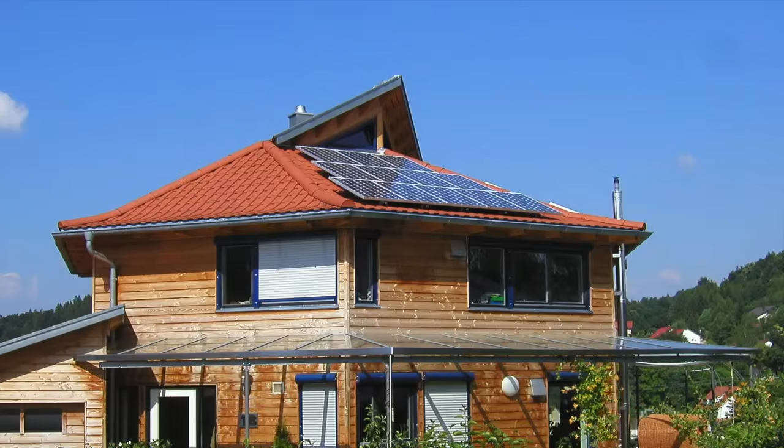By promoting renewables for electricity as well as heat markets at a very early stage, Germany laid the foundations for this new and emerging sector. With its strong home markets, Germany is today in a position to make its know-how available to partners throughout the world. The German wind power market is among the largest in Europe.

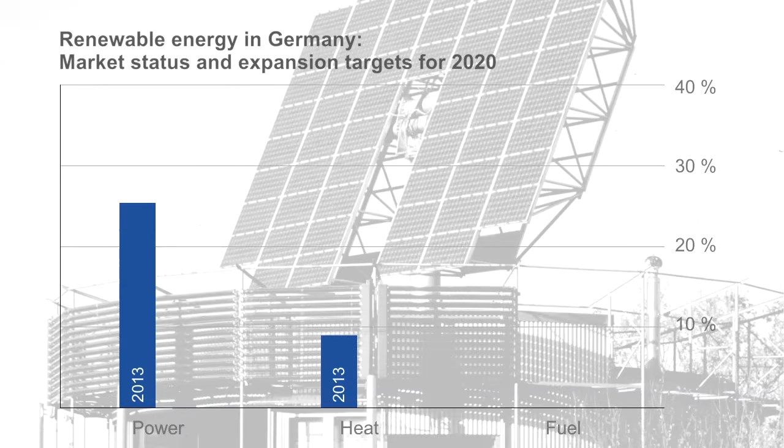In the area of photovoltaics, the German market is among the most developed markets in the world. In 2013, renewable energy supplied more than 25% of the power consumption in Germany and 9% of its heat. In the fuel sector, the percentage share was 5.3%.

Official plans envisage a share of 35% in the power sector and 14% in the heating sector being achieved by the year 2020. In the fuel sector, the share achieved should be 10%. It is planned that by 2030, renewable energy should represent 30% of the final energy consumption. And that is just the beginning.

A German company shows here in its own headquarters just what can be achieved: a building complex which is completely energy self-sufficient.

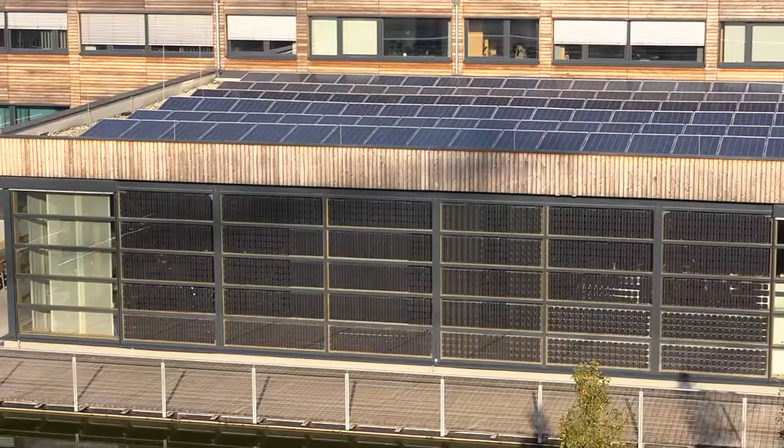My vision of the future with regard to renewable energy is quite simple: 100% renewable energy as quickly as possible throughout the whole world.

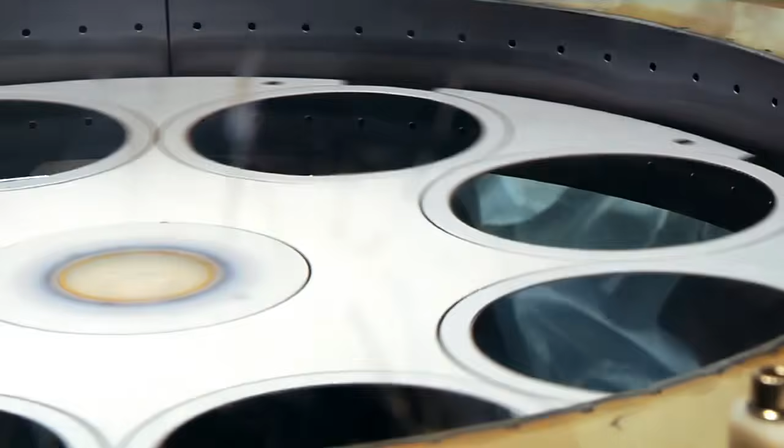In addition to its early development of the market, Germany also occupies a leading position in the further development of renewable energy technologies due to its promotion of research and development in this area. People around the globe trust German expertise. This makes German companies, thanks to their many years of experience, important and strong partners in all areas of sustainable use of renewable energy.

Wind power has been used in many regions of the world for centuries, whether it is for grinding corn or pumping water out of the ground.

Modern wind turbines use the kinetic energy of the wind and generate electric power from it. Each individual multi-megawatt system generates power for several thousand people, and the technology is one of the most efficient of all the renewable energy systems.

At the end of 2013, there were wind power turbines with an output of around 318,000 megawatts installed throughout the world. Germany has taken a leading role, with over 34,000 megawatts of installed capacity, and is the third largest wind power market in the world, which makes it the largest in Europe.

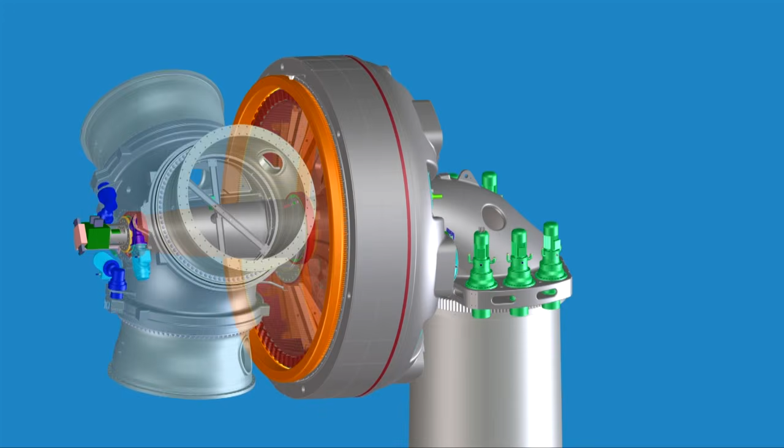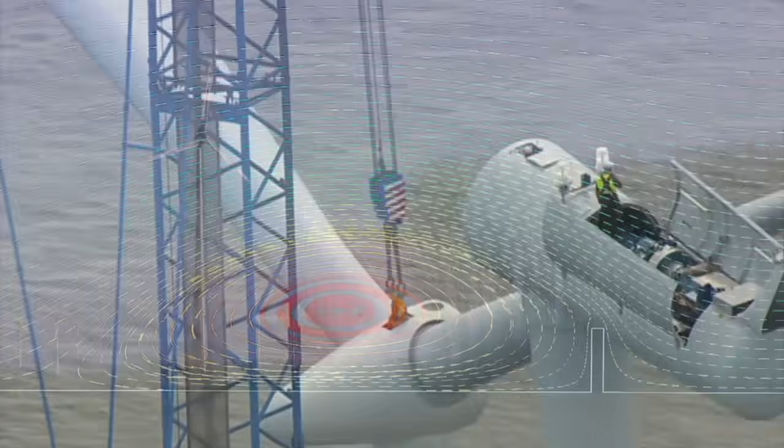Wind power turbines are built on towers, which are often over 100 meters high. The wind blows stronger and more consistently at this height than on the ground. In addition to this, the power yield depends largely on the circular area of the rotor. Modern turbines have a rotor diameter of 40 to 90 meters or even more.

Modern control and monitoring technology is designed to ensure that the turbines can adapt in the optimum way to the widely varying wind strengths. These and other components, like grid management systems, help to integrate wind parks into the electricity network.

The technical demands on an efficient wind system are very high. Due to their decades of activity in wind power, German manufacturers are very experienced and are among the market leaders in the world. They are constantly developing new innovations and are therefore always ahead of the international competition. The focus is on saving weight, operating reliability, and a constant increase in the efficiency rate.

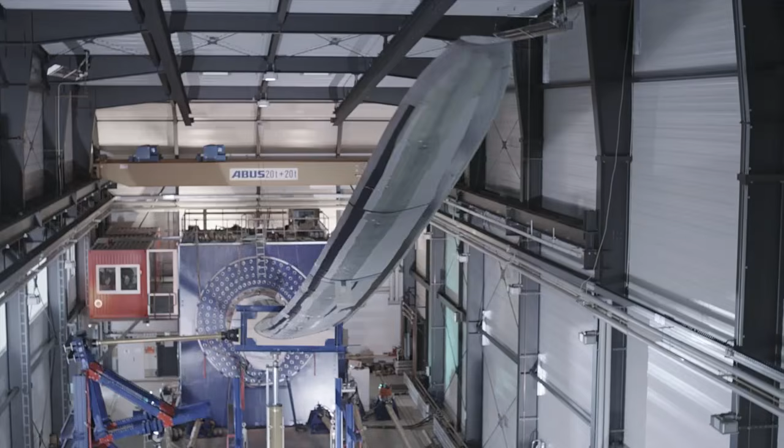Germany's technological market leadership in the area of wind power is demonstrated not only in the overall turbine, but also very clearly in the individual components. Germany is the world leader in the manufacture of gearing systems. We also build highly efficient rotor blades, and this goes for many other components as well, such as generators. This means we have a market leadership which runs through all the components.

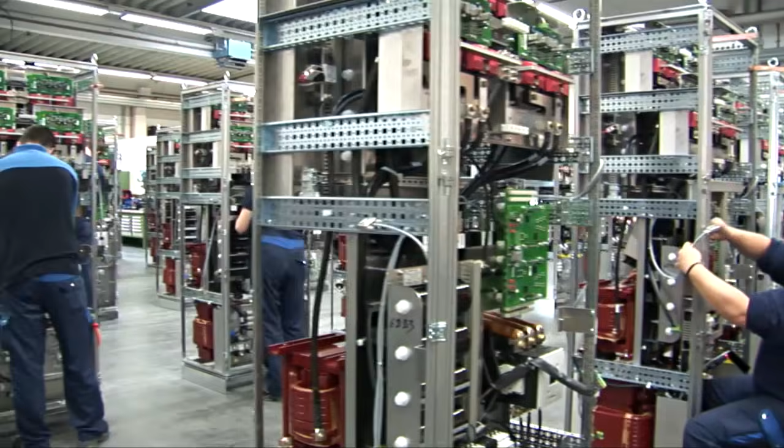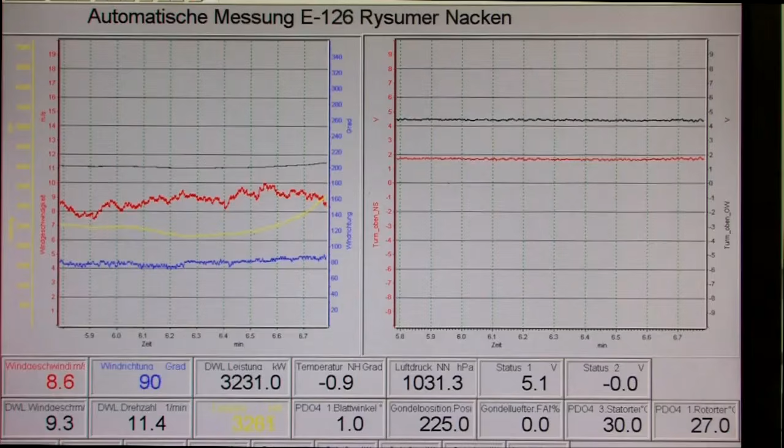German know-how enables successful wind power projects to be implemented throughout the world. With well over 137,000 people employed in the industry, it exports more than 65% of its turnover. The German wind power industry has a leading position in the world market. German companies export complete drive systems, as well as individual key components or control systems, so-called condition monitoring systems. German experts also possess comprehensive know-how in the planning and project development of wind power systems and wind farms.

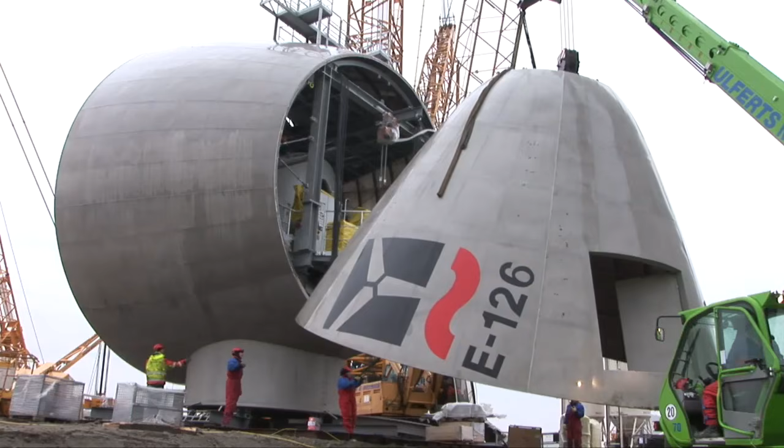One example of a high-output wind power plant produced in Germany is this 7.5 megawatt turbine near Emden. With a rotor diameter of 127 meters and a hub height of 135 meters, it is one of the largest onshore wind power turbines in the world.

At the same time, Germany is also making great efforts to adapt and coordinate the power network infrastructure so that the ever-increasing power supplies from wind power systems and other renewable energy sources can be integrated.

The wind blows stronger and more consistently over water. This means that a significantly higher energy yield can be achieved here. The expansion of offshore wind farms will therefore increase in importance and sustainability in the coming years. German companies have already successfully implemented several offshore wind projects in relatively great water depths. By 2030, offshore wind farms with a total output of 40 gigawatts are planned in the North Sea and Baltic.

Offshore wind power is the key to tomorrow's energy generation. We have ambitious political targets to be achieved by 2020. We can only achieve these if we have an energy source which can supply renewable energy on a large scale.

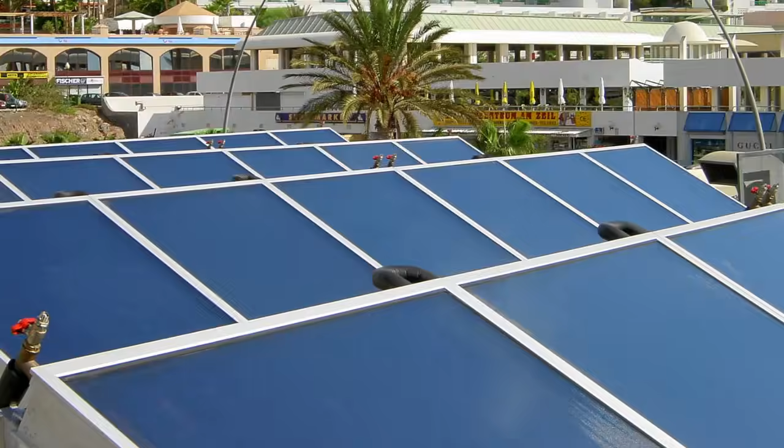The Sun, energy supplier for life on Earth. In just 1 hour, the Sun supplies us with more energy than is consumed per year throughout the world. It is due to the contribution of German development engineers that we can use solar energy today for our own needs, for heat generation with solar thermal energy, or for power generation with photovoltaics and solar thermal power plants.

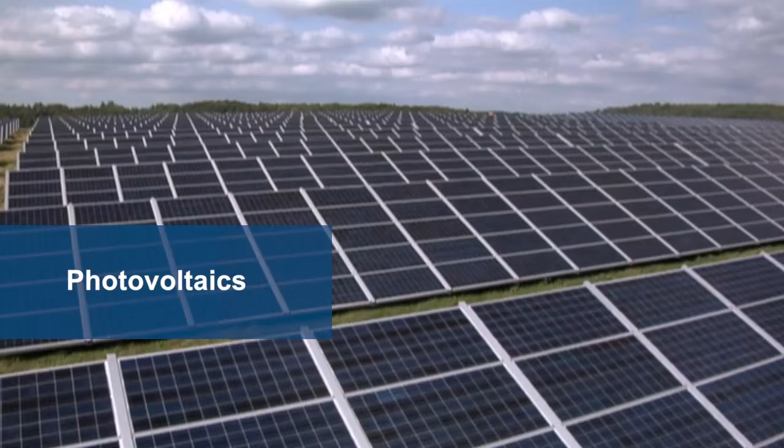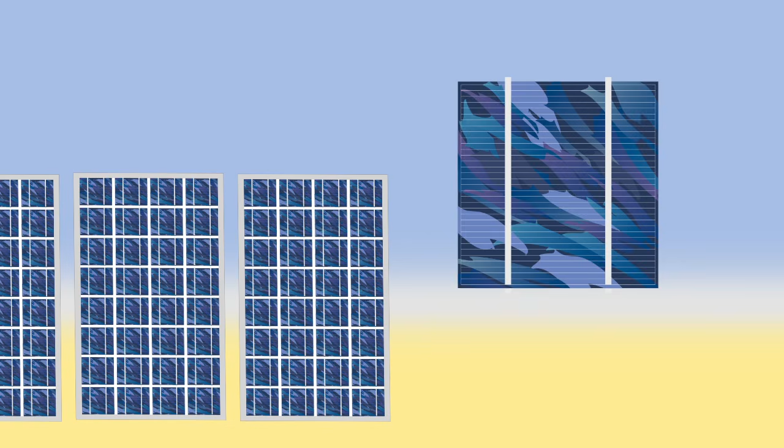Solar cells convert the sun's rays into electric power. Crystalline silicon cells are by far the most widely used these days, but the use of material-saving, thin-film solar cells has also increased in recent years. In a solar module, several solar cells are electrically connected. Together with additional units, such as inverters or batteries, complete photovoltaic systems are created.

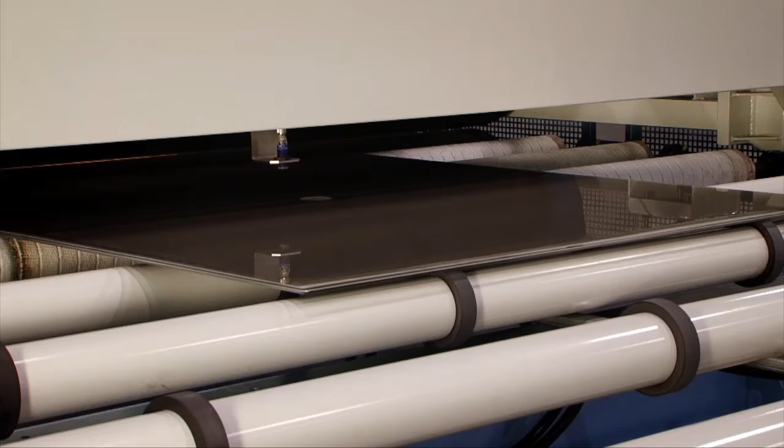A high-tech industry has arisen in Germany with the help of the renewable energy law. Due to intensive research and many years of experience, it has been possible to manufacture ever more efficient and cost-effective solar cells, while at the same time significantly reducing the use of materials.

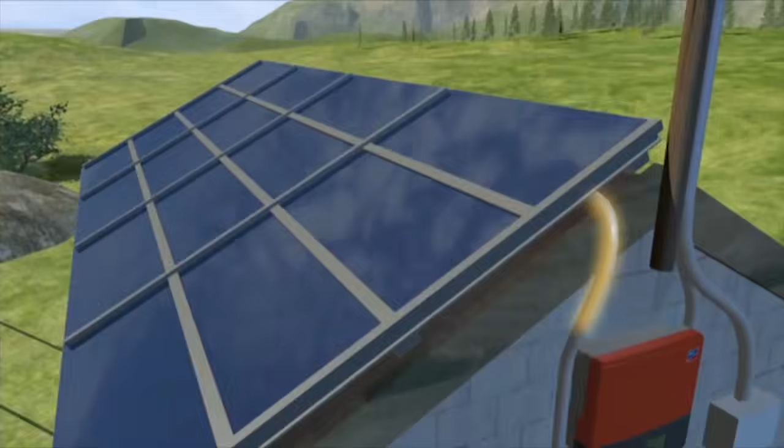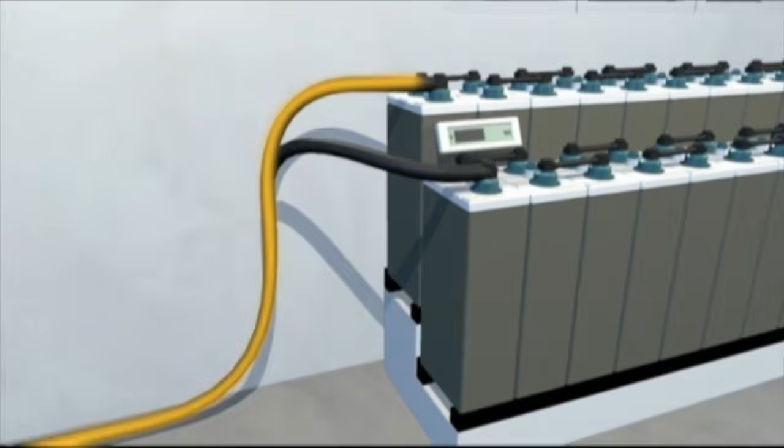Germany is also at the forefront in the export of inverters. Inverters are required to convert the direct current of the solar cells into the alternating current required for the mains power network. The most efficient models in the world are produced in Germany. Furthermore, modern inverters play a crucial role in managing the amounts of current fed into the grid, or directing excess amounts into storage solutions.

We have had the nucleus of research here with us for 35 years. This has not only flowed into our end products, but also into each of the raw materials.

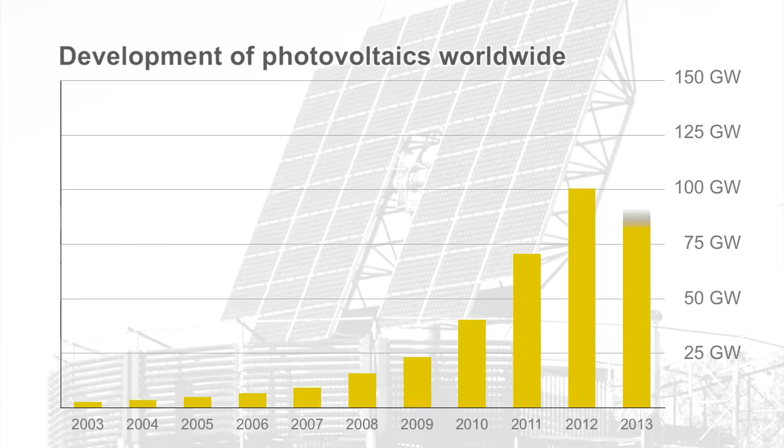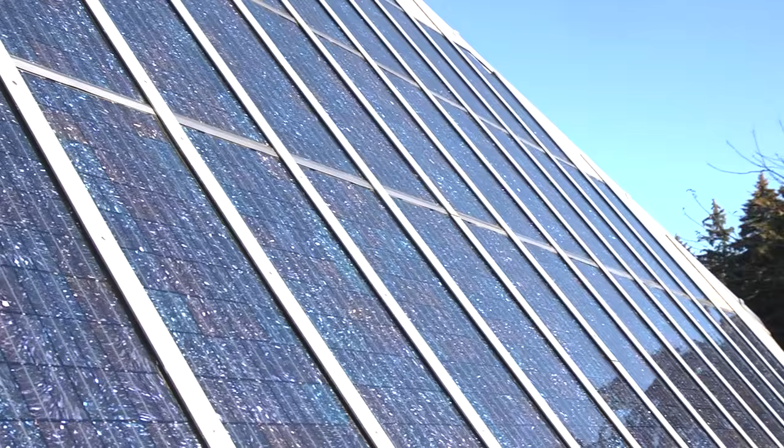Today, the photovoltaics industry is a multi-billion market. At the end of 2013 alone, new equipment with a total capacity of over 38.4 gigawatts has been installed worldwide. Grid-connected photovoltaic systems are currently experiencing the strongest growth, but photovoltaic systems also offer economic solutions for the supply of energy to remote areas.

Solar home systems supply, for example, alpine chalets with solar power. The Rappenecker Hut in the Black Forest is Europe's first solar-powered restaurant. An integrated battery assures that around 70% of the yearly energy demand can be covered by renewable sources.

Here in Senegal, a German company has installed the solar power supply for an entire village. The inhabitants can now drive a water pump and use the power for their school and infirmary.

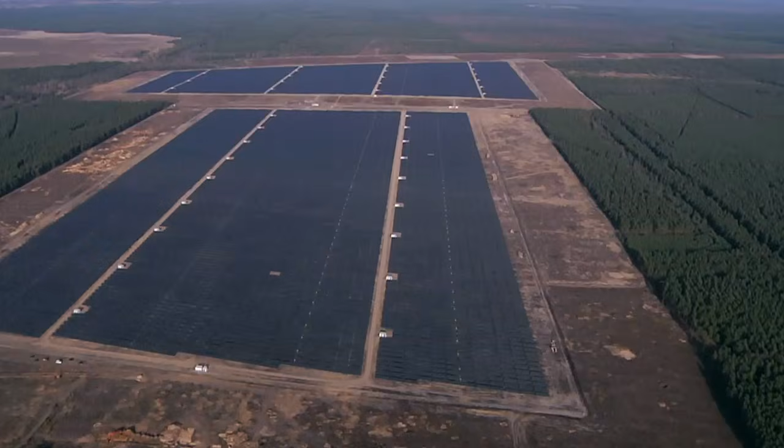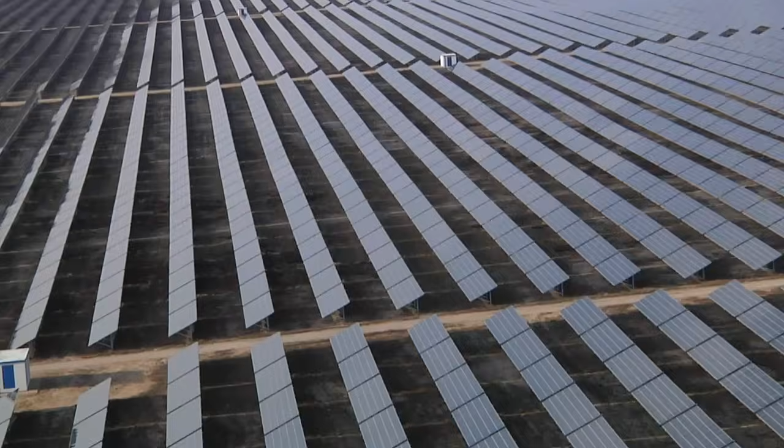Here in Lieberose in eastern Germany, the second largest photovoltaic power station in the world at the time came into operation in 2009. Constructed on an area equivalent to 210 football pitches, the power station provides a capacity of almost 53 megawatts, equivalent to the power requirements of 15,000 households.

Photovoltaics is the most innovative product in the area of renewable energy. We will have the same power prices in Germany with photovoltaics as those currently found with wind power. We have achieved success insofar as we are able to build a very high-quality product at a very reasonable price.

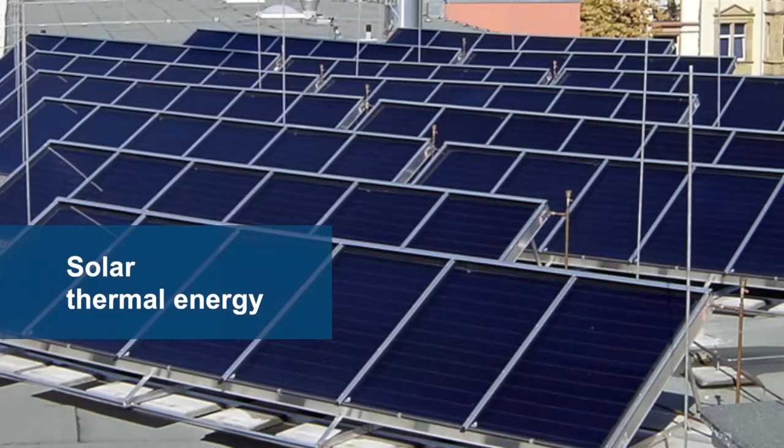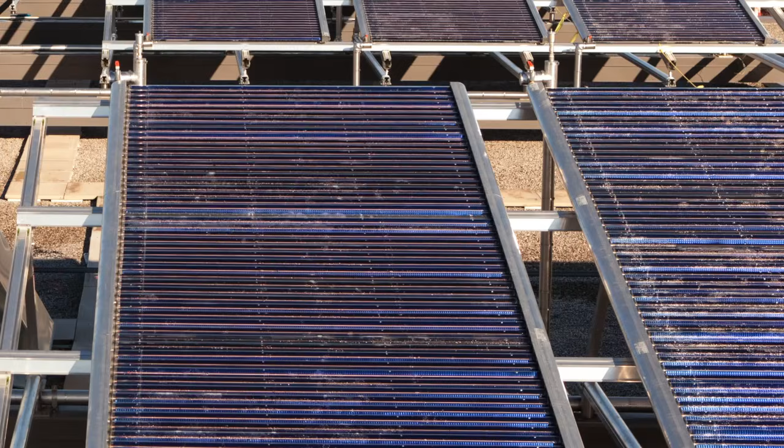The sun's rays can also be converted directly into heat, or also into cooling energy. The technology for this has been proven in Germany for decades. One distinguishes between plastic absorbers, flat plate collectors and vacuum tube collectors. The German solar thermal energy industry has many years of experience in the production of solar heating equipment and is one of the leading producers worldwide.

It is therefore no surprise that in Germany today, 17 million square meters of solar heating equipment have been installed on roof surfaces for hot water heating and room heating, and increasingly so for apartment blocks and commercial businesses. The energy gained by means of these collectors is also used to operate air conditioning units.

With the Oxford Gardens solar roof project, which was coordinated by the German Energy Agency, DENA, and supported by the German Federal Ministry for Economic Affairs and Energy, German companies have completed the currently largest solar cooling and heating installation in Canada.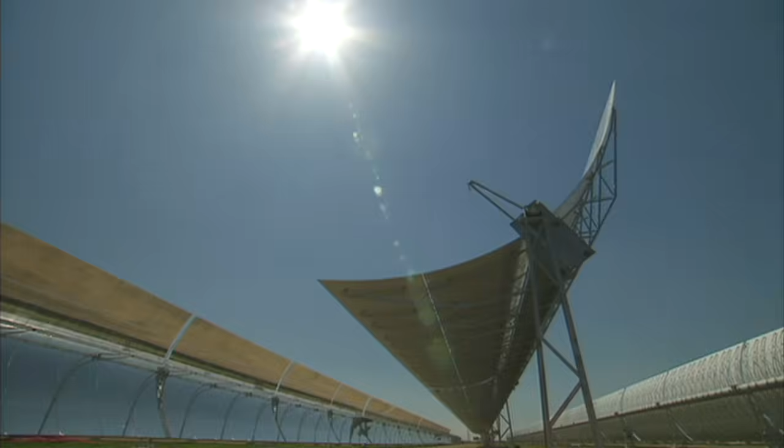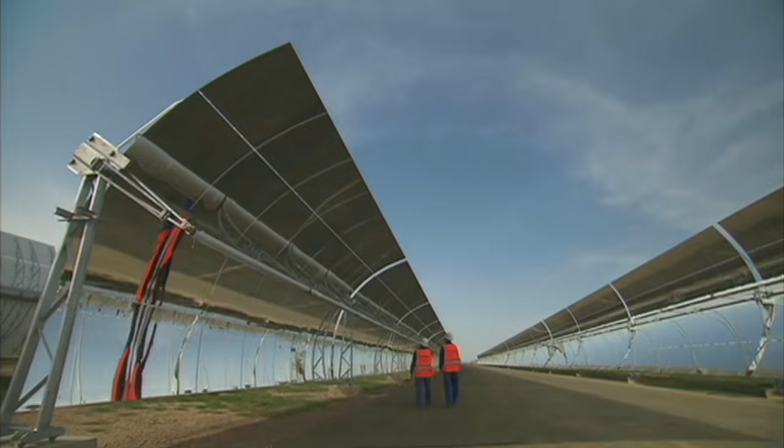Concentrating solar power is a powerful opportunity to gain electrical energy from the sun's rays. The existing types of power station are generally differentiated by the mirror systems used, such as parabolic trough, Fresnel collector, solar tower, and dish Stirling systems.

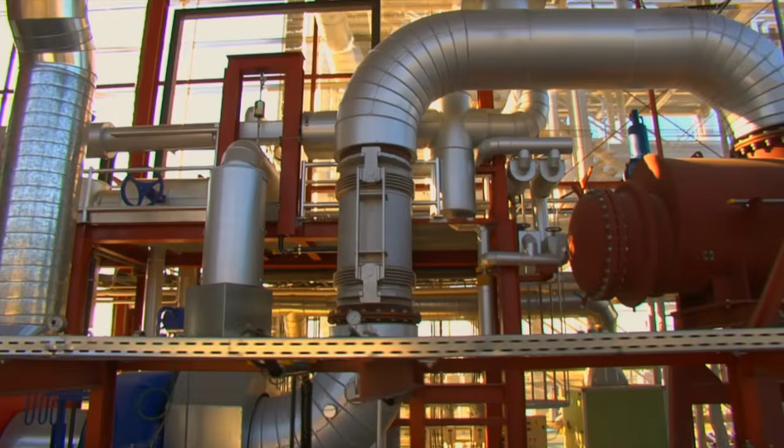In the case of parabolic trough power stations, the sun's rays are concentrated via parabolic mirrors onto an absorber. Through this process, the heat transfer oil contained in the absorber is heated to 400 degrees Celsius. This heat energy can then be converted to power via steam turbines or gas turbines.

Germany is the world leader in the research and development of this technology. New concepts such as the Fresnel collector were also developed and launched onto the market by German companies, who have then implemented them in pioneering projects.

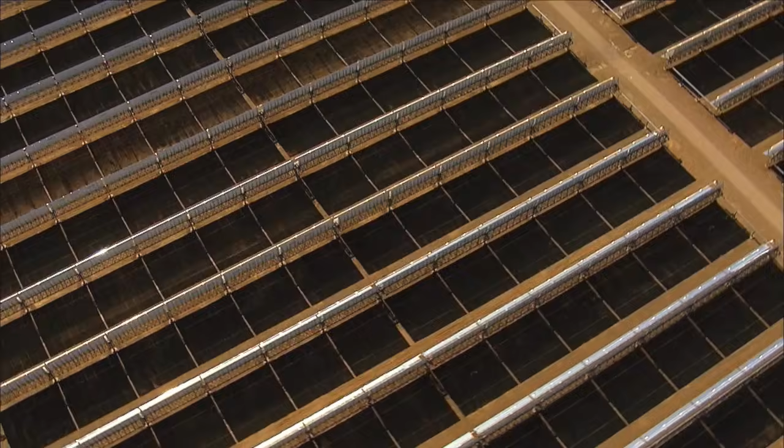The power station complex of Andasol 1, 2 and 3, which was completed in Spain between 2006 and 2011, was initiated and developed by German companies.

CSP plants, together with storage solutions like molten salt, offer the possibility to provide electricity even in the dark.

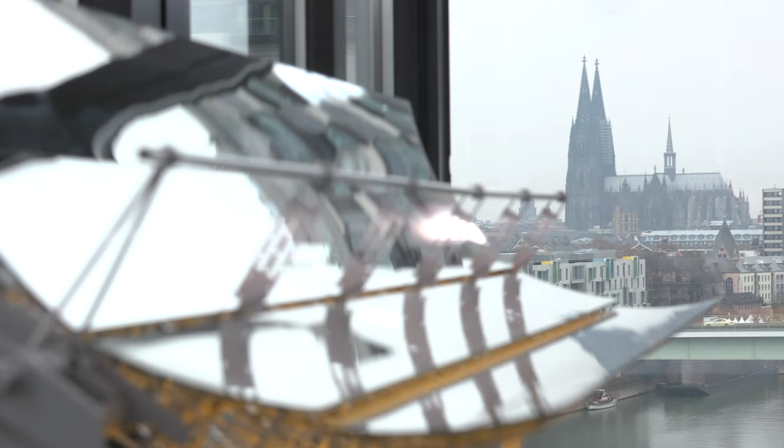Among those large projects which are currently running, we do in fact have a large number of German companies which supply both components and engineering services in the widest sense. And we also expect in future further strong growth, driven by the technological developments which we already have or which we intend to bring to the market in the future.

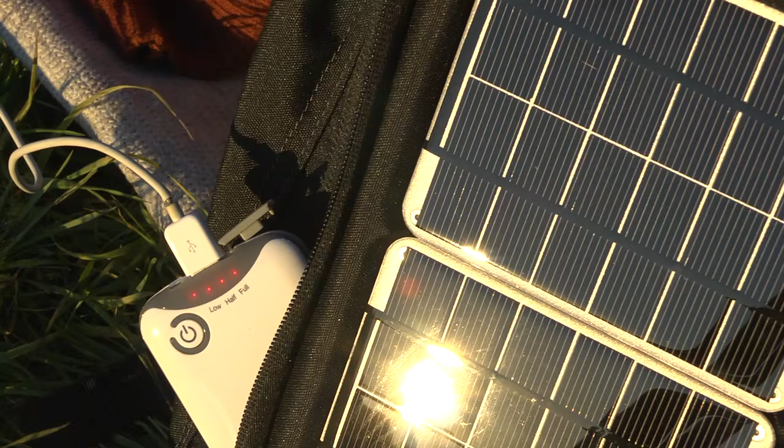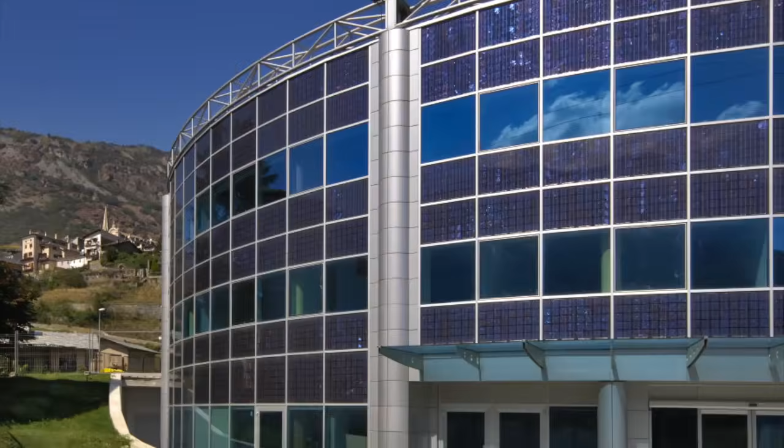Today, solar energy is present in everyday life, whether it is at home, on the roads, or for leisure time. And solar equipment is also increasingly determining the design of modern buildings. But the future has only just begun. German companies are working at high speed on the further development of the technology and its areas of application.

Biomass, the energy source which has been used for the longest by humans. The use of biomass is climate neutral, since only as much CO2 is emitted as was originally extracted from the environment during the growth of the biomass.

Up to now, biomass has been the most widely used among all the renewable energy sources, for a good reason. Bioenergy can be provided at any time as required, and many countries have access to usable supplies of biomass. Bioenergy can be used in solid, gaseous and liquid form. Solid biomass, biogas and biofuels can be part of a sustainable and future-proofed energy mix.

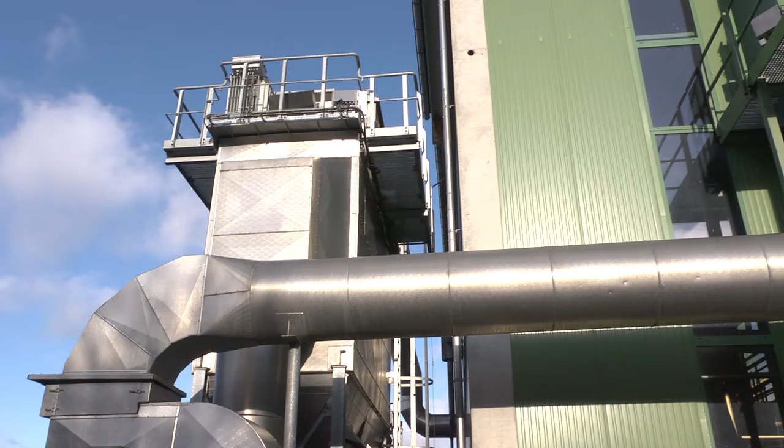Solid biomass includes all dry or dried items and bulk materials made from plants and plant constituents. During the combustion of these materials in modern German heating systems, the energy contained in the biomass is used very efficiently. The dominant energy source is wood in the form of firewood, wood chips, and pellets.

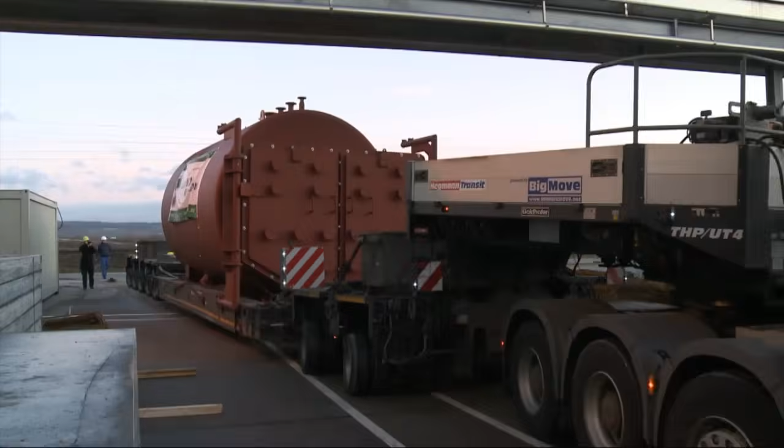Energy generation from solid biomass has been continuously developed further in Germany, also with regard to the sustainable use of these energy sources. German equipment technology is characterized today by a high level of reliability and by solutions which are tailored to the needs of customers.

Among the particular strengths of German suppliers are intelligent control and monitoring technologies, and the development of automatic feeding systems.

Small-scale biomass boilers can be supplied for the direct heating of single-family houses and apartment blocks. Biomass boilers can also supply heat very efficiently through local heating networks.

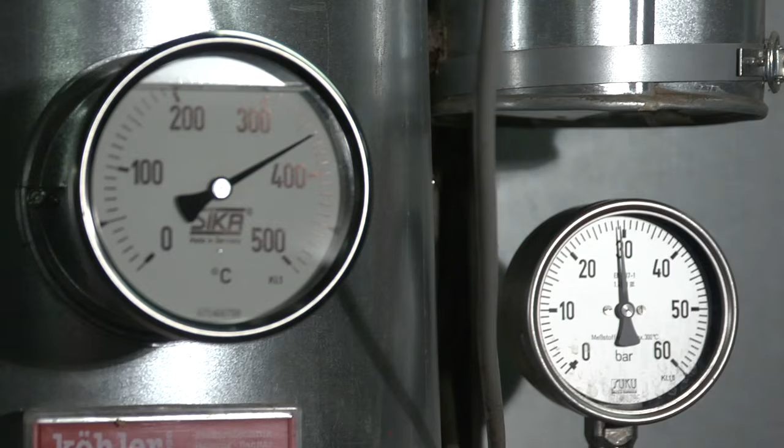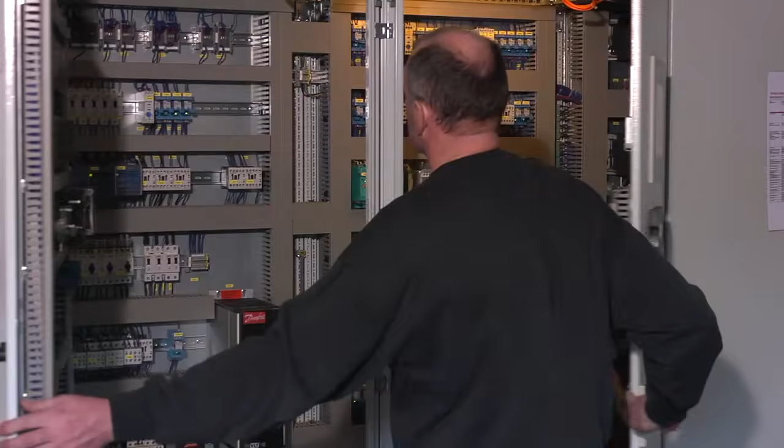So-called combined heat and power (CHP) systems provide both power and heat at the same time, and they are therefore particularly efficient. German equipment is among the most technically pioneering in the world.

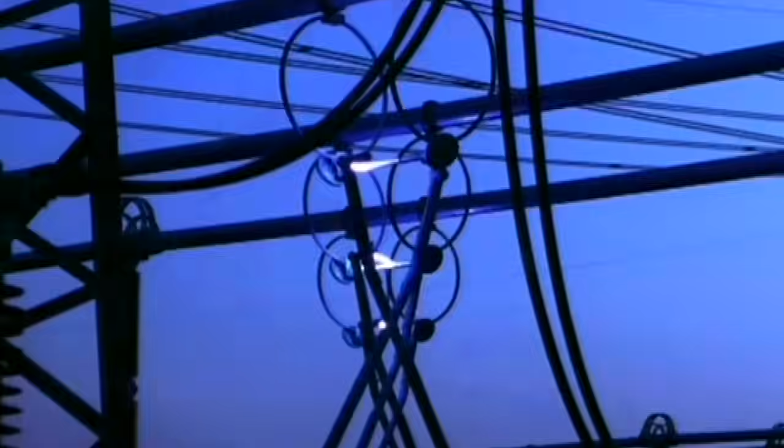Energy generation with solid biofuels is on an upward trend. The number of installed wood pellet heating systems alone rose in Germany from approximately 33,000 to 325,000 in less than 10 years. In the European Union, more than 72 TWh of electricity were generated from solid biomass in 2011. More than half of it was produced in modern CHP plants.

Biogas arises from the fermentation of biomass. It is used worldwide in many different ways for the supply of energy. Germany is both the market leader and technological pioneer in the generation of biogas.

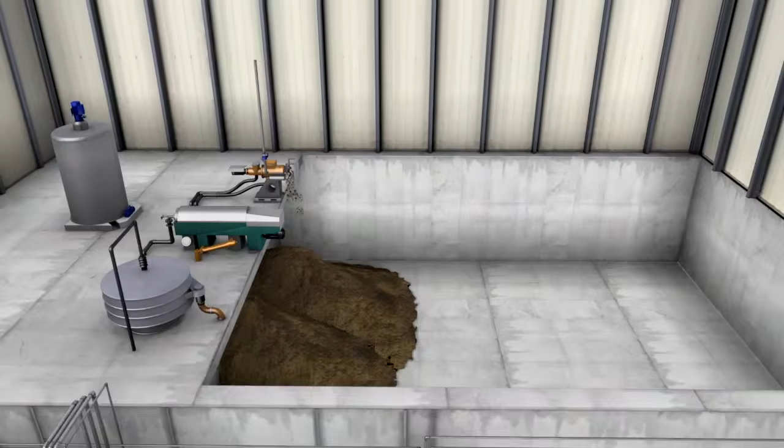German companies cover the entire added value chain in biogas technology, from planning through to financing and right up to the operation and maintenance of biogas plants. They have many years of experience in process biology and the corresponding laboratory services.

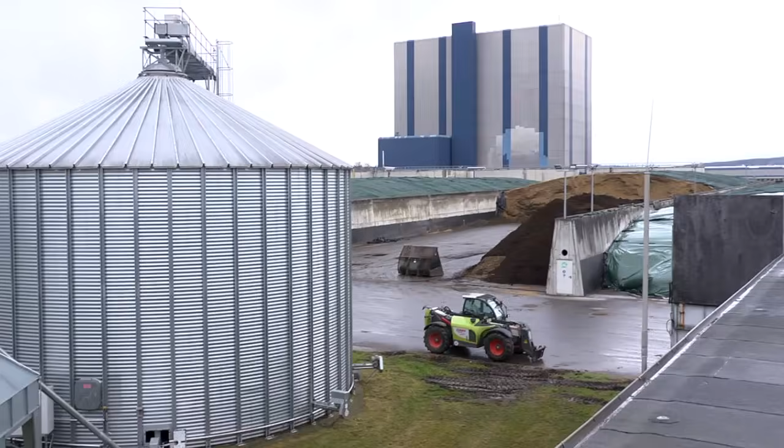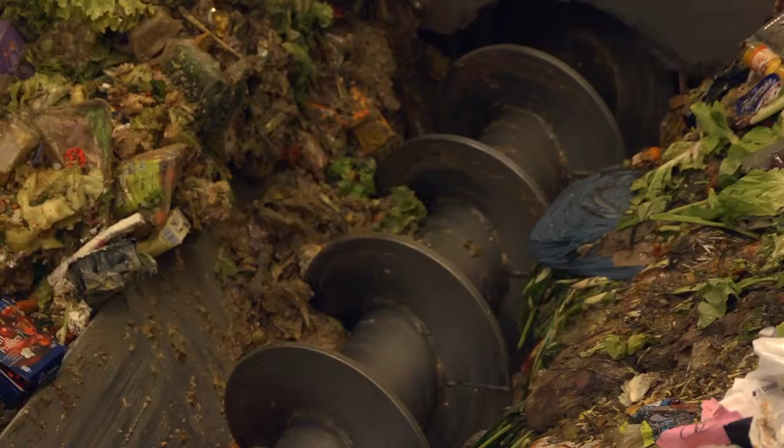Biogas can be captured from many different resources, among these are residual products and energy crops from agriculture, as well as organic waste from industry and households. Waste and refuse are therefore no longer a disposal problem, but rather an energy supplier. Waste to energy is increasingly gaining in importance internationally.

The fermentation process in the organic substance occurs with the help of different anaerobic bacteria. The optimization of these microbiological processes is a decisive factor with regard to the productivity of the biogas system.

We have developed a special mix of efficient bacteria, which increases the degree of decomposition of the valuable raw material which we use in the biogas system. This also makes the substrate more fluid and easier to pump, so that efficiency is increased in the whole fermentation process.

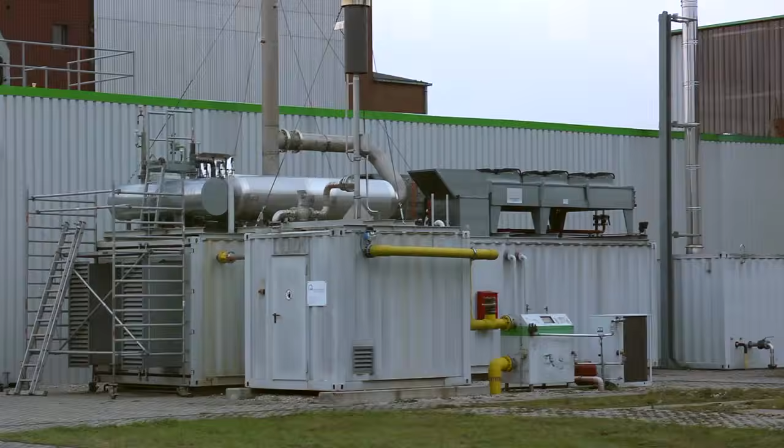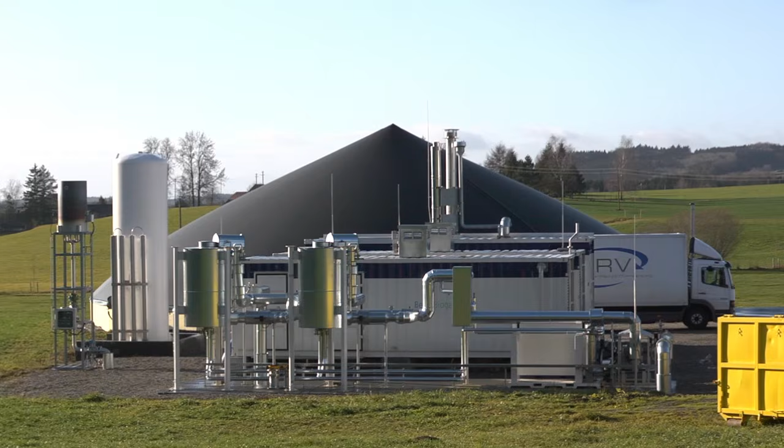Biogas is mostly used in combined heat and power stations for generating electric power. Modern German biogas treatment plants also enable the gas to be treated in such a way that the quality of natural gas is achieved. One innovation here is the treatment of gas without the use of chemical cleaning agents. The diaphragm technology used here can be economically attractive in certain locations.

The biomethane which is given off in the treatment process can be fed into and stored in the natural gas network, or used as fuel for natural gas vehicles. Alongside this, German manufacturers are also developing high-quality liquid fuels from biological raw materials.

We have accumulated a lot of experience over 15 years, and we have invested very heavily in research in order to drive biogas technology forward. We have therefore a highly efficient technology, which can be used for agricultural purposes, as well as for the benefit of investors in large-scale operating plants and of professional operators in industrial companies.

Around 7,800 biogas plants supplied over 7.5 million German households with electricity in 2013. This makes Germany the largest biogas producer in Europe.

Biogas is also becoming increasingly important worldwide for a secure and cost-effective supply of energy. Bioenergy has a long past and an important future.

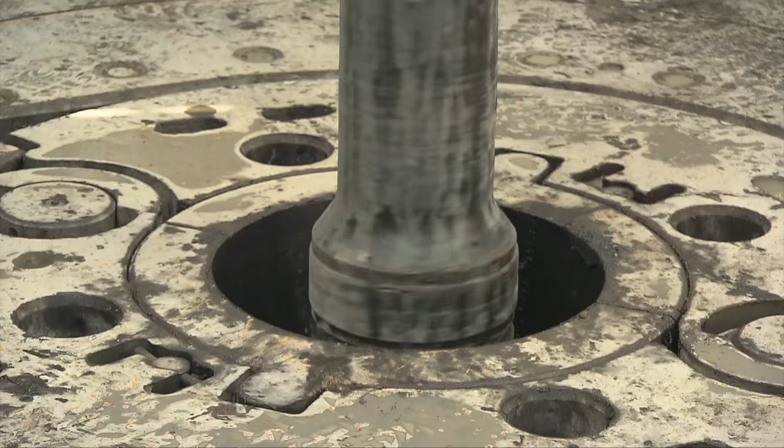Geothermal heat, an inexhaustible source of energy. Some 99% of our planet is hotter than 1,000 degrees.

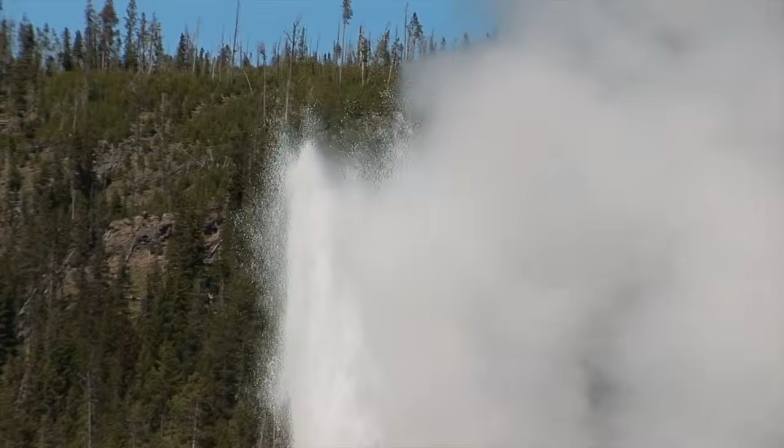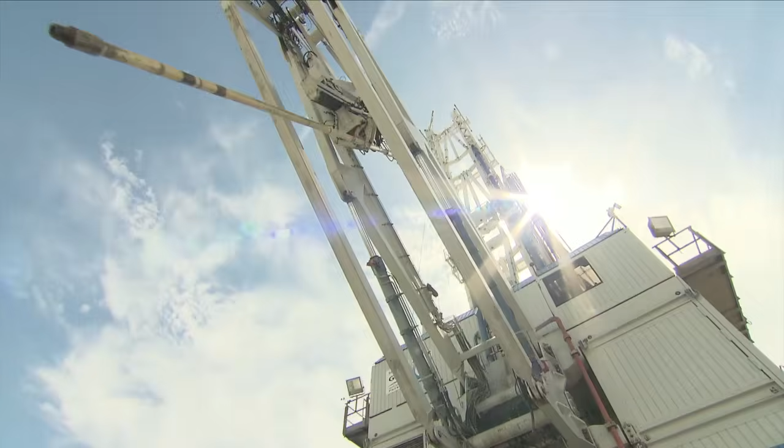Geothermal heat is available around the clock, irrespective of the season, weather, or climatic conditions. In some countries, among them Germany, the use of geothermal heat has been part of the energy supply for many years, whether it be for the generation of domestic heating, electrical power, or energy for air conditioning. The number of employees throughout the German geothermal energy industry is already more than 17,000.

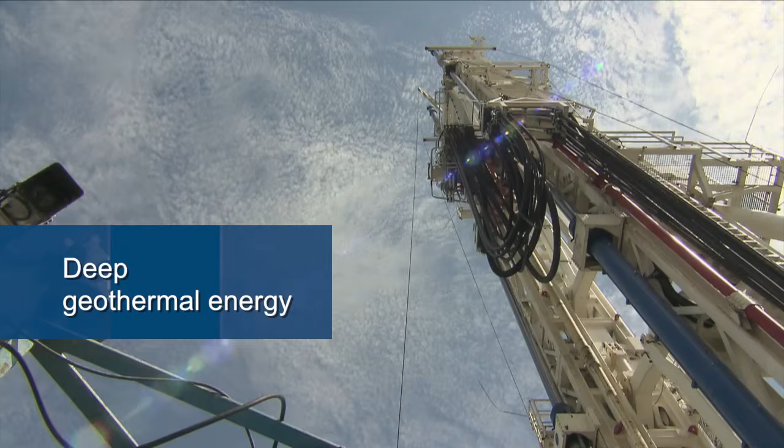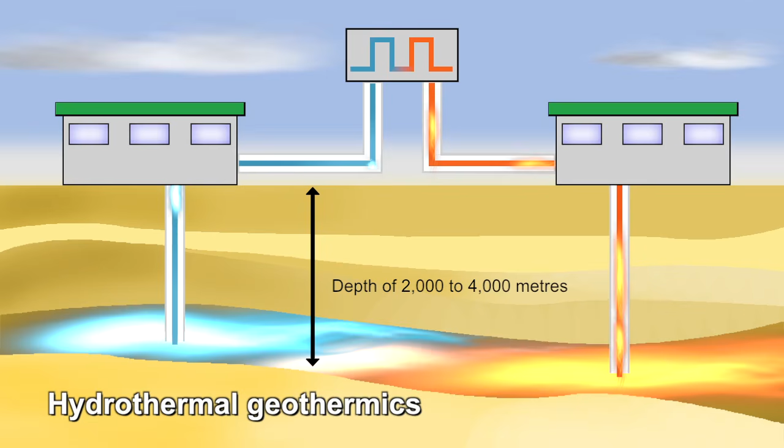Deep under the earth, at a depth of 500 or even several thousand meters, it is particularly hot. With hydrothermal geothermics, the thermal water present is pumped to the surface from a depth of 2,000 to 4,000 meters. With petrothermal geothermics, water is injected into hot, deep-lying rock layers. It heats up there and can then be brought to the surface. This process is also known as hot dry rock.

Such deep boreholes require far-reaching technical know-how and special drilling equipment. German companies have stepped up to this challenge.

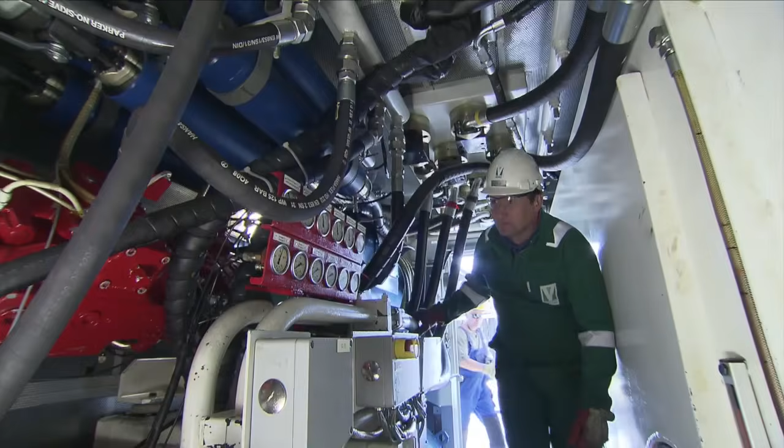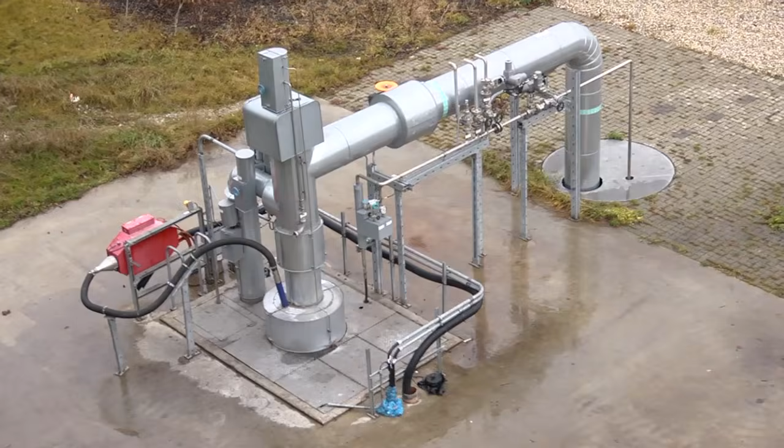A geothermal plant at Unterhaching near Munich supplies several thousand inhabitants with heat and electric power. Hot water is pumped to the surface from a depth of 3,500 meters. Part of the energy is fed into the district heating network via a heat exchanger. The remaining geothermal heat for use in power generation is first given off to heat up an ammonia-water mixture. This mixture vaporizes at lower temperatures and can then produce steam to drive a turbine.

The great advantages of geothermal energy are firstly its availability, and secondly the diversity of its applications. We in Unterhaching are stepping up to the mark to ensure supply of CO2-free energy to all of our citizens.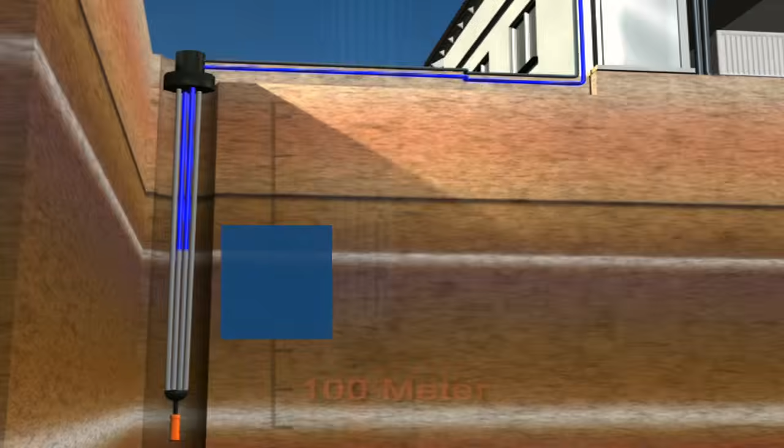The near-surface substratum also offers usable heat. It is normally used for heating a building or supplying it with hot water. There are different systems available.

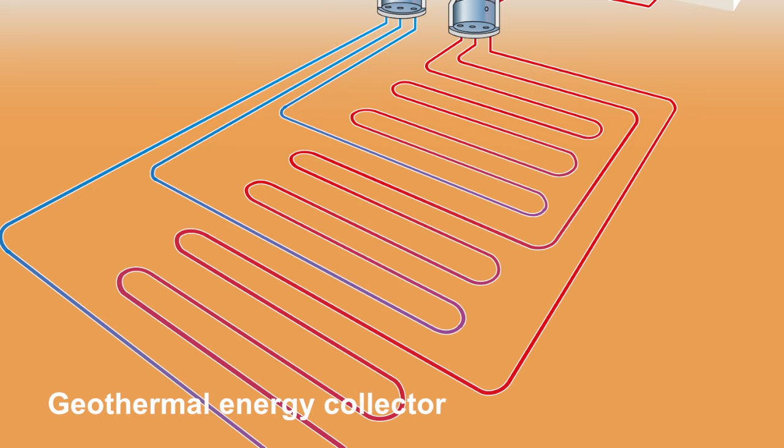Geothermal energy collectors are laid horizontally at a depth of 80 to 160 centimeters. The heat carrier medium, which circulates through the looping pipes, draws energy from the ground and transports it to the heat pump. Geothermal energy probes are inserted at a depth of 50 to 160 meters.

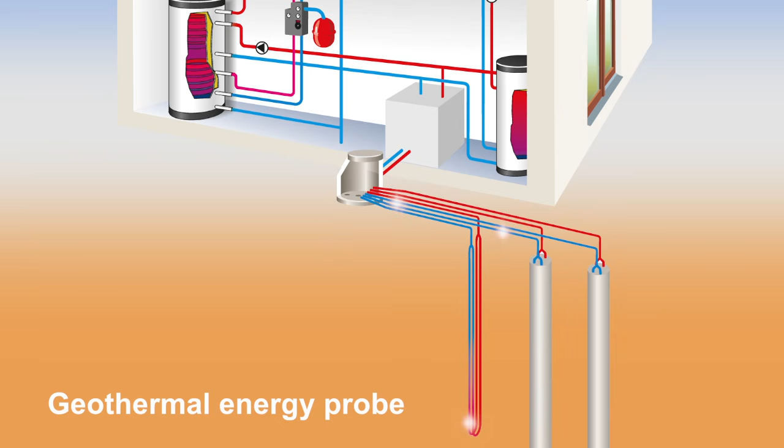Their surface requirement is smaller. A liquid in the probes warms up to a temperature of up to 13 degrees Celsius. As a result of their many years of experience, German manufacturers can offer systems which are especially reliable and user-friendly.

Both small living units and complete residential areas can be supplied with heat and cooling by means of geothermal systems, cost-effectively and environmentally friendly. Germany is a pioneer in the area of geothermal energy.

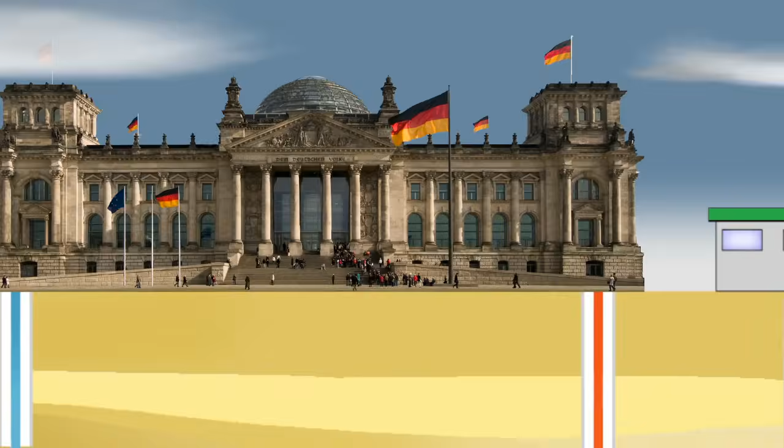Germany is a pioneer in the area of geothermal energy. The German parliament and other government buildings are heated or cooled as required with the help of geothermal energy. In summer, discharged heat from combined heat and power stations is stored in an underground stratum layer. In winter, it is fed back into the heating networks.

The cold from the winter air is stored in a second underground storage layer. This is then used in summer for the air conditioning of buildings.

German companies have been active for some 30 years in the sector of geothermal energy. Here we have achieved something really pioneering, also in terms of international geothermal energy, and that is also the reason why so many visitors come to Unterhaching to see what we have done here.

Many countries throughout the world possess a high geothermal potential. In the light of rising costs for fossil fuels, geothermal energy will gain significantly in importance in the future. Geothermal energy is much more than a fascinating natural spectacle.

Water covers over 70% of our Earth. It is the source of life on Earth, and also a supply of power for more than 100 years.

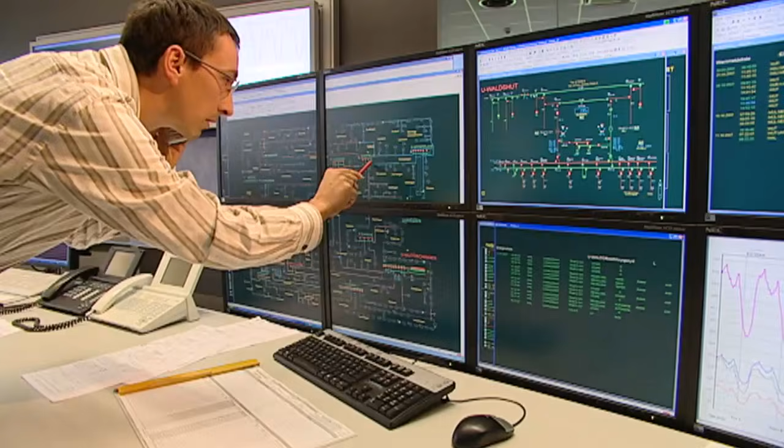The use of hydroelectric power provides a cost-effective and proven method of ensuring the basic supply of electricity. Depending on the type of power station, it can provide or store energy and therefore make a significant contribution to the stability of the power grid.

There are different types of hydroelectric power stations. Run-of-the-river power stations use the flow energy of a river. With storage power stations, the water is dammed in a lake and then fed via pipes into the lower-lying power station.

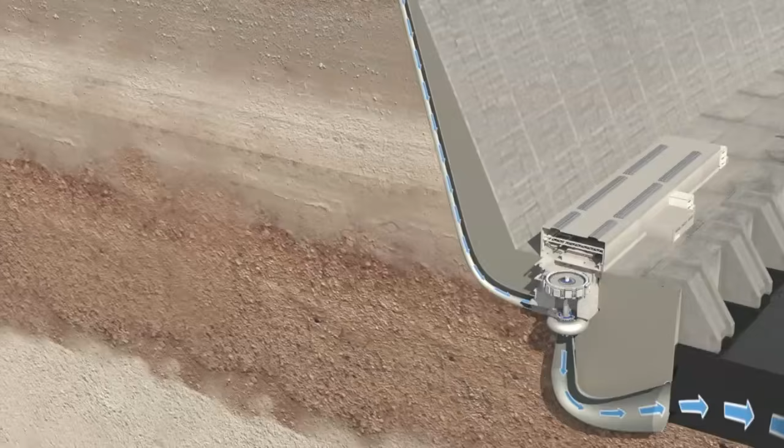Wave power and tidal power stations convert the power of the sea's waves and tides into electric energy. Hydroelectric power currently generates around 16% of the worldwide gross production of electricity.

There are 7,500 such power stations in Germany alone. Large growth can be seen in particular in Asia and Latin America.

For us, hydroelectric power is an ideal addition to the already existing range of renewable power sources because it is baseload capable. That means that we do not have to ensure its security of supply with conventional energy generation, something which is a decisive advantage, for example, in competitive situations for commercial energy supply projects, where there is, of course, particular emphasis placed on stability of the output.

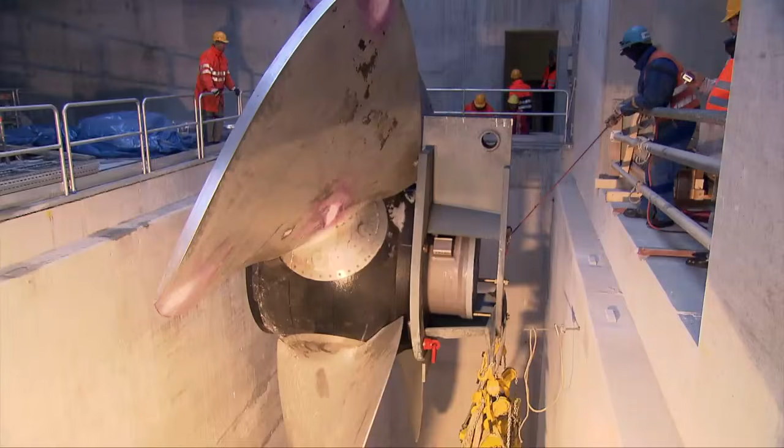German companies have developed, installed and operated hydroelectric power stations for more than 100 years. This long-lasting experience builds the basis for the success of German technology worldwide.

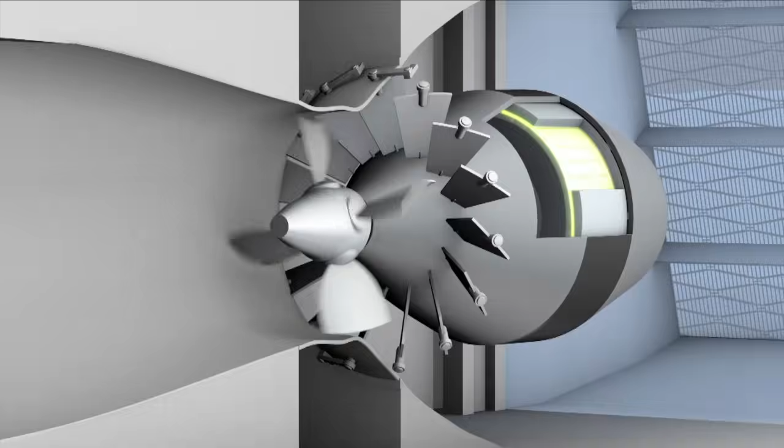Different types of turbines are designed depending on the flow rate and the drop height. German engineers create high-tech equipment, which is ideally tailored to the individual application.

The digital oversight and support of hydroelectric power stations is also part of the range of services offered by German suppliers. Due to modern monitoring systems, the functioning efficiency of the equipment can be monitored worldwide.

We have opted for a partner company which we know from other such energy generation projects. Another factor, which also of course plays no less a role, is the innovative concept throughout, which we were able to put into effect and with which we are very satisfied at present.

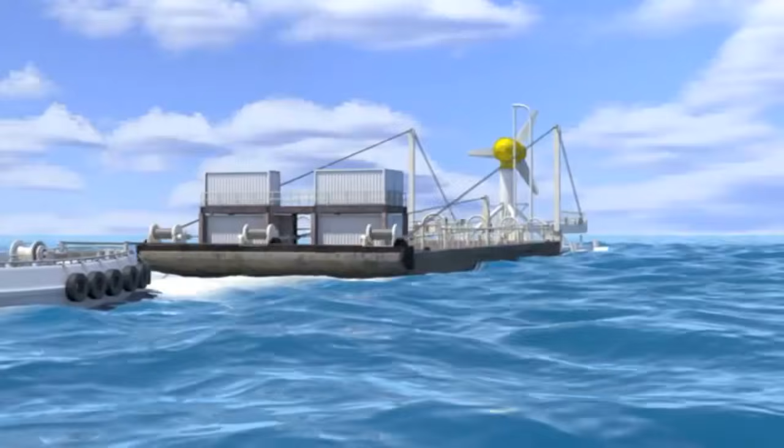The power of the oceans also holds great potential for energy generation. A tidal power station uses the tidal flows and can generate an output of 1 megawatt in this way.

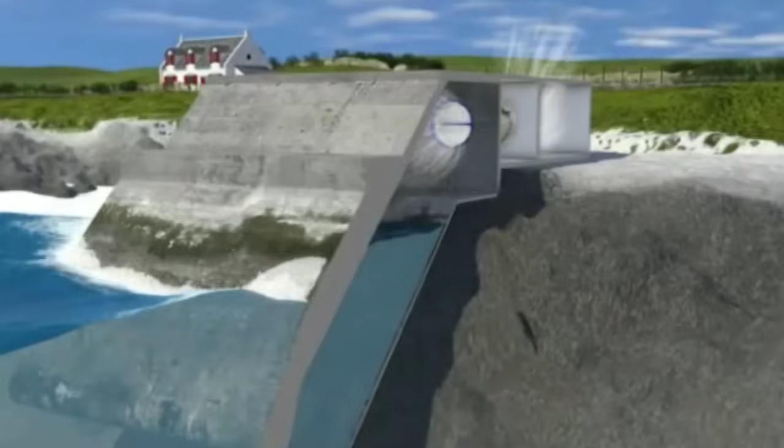This wave power station was built in Scotland. The so-called Wells turbine converts the energy of the sea's waves into electricity, a technology with great worldwide potential.

Many hydroelectric power stations have been in operation for decades. There are great opportunities in this area for German engineers. They can significantly increase the effectiveness of such power stations by means of repowering. Old turbines are replaced by new and more efficient models.

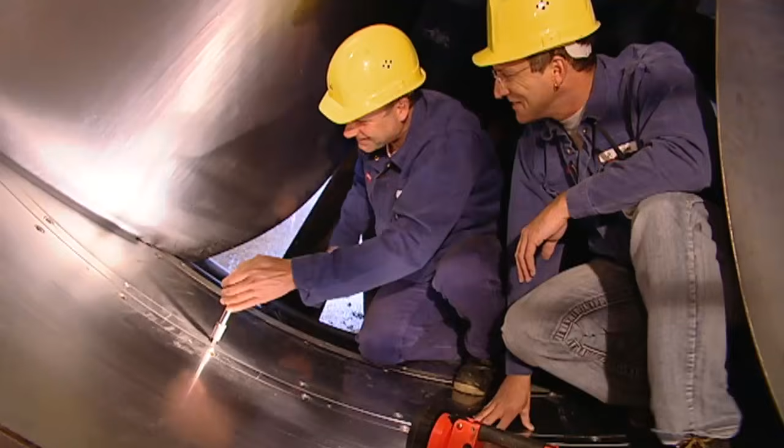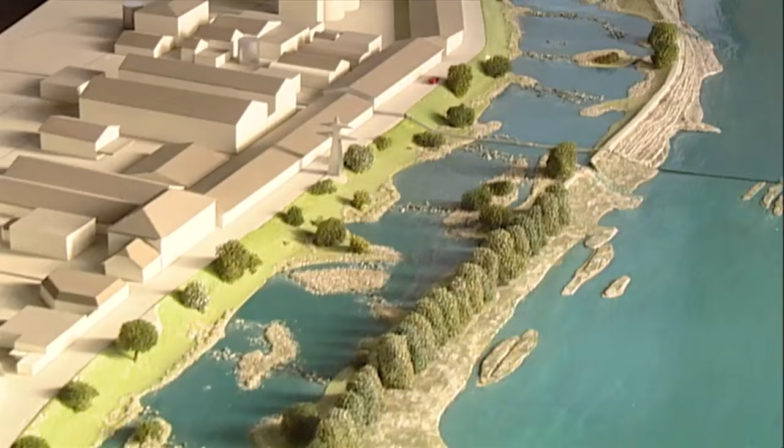The controls and monitoring are modernized and optimized. There is also an increasing importance in this regard for the need to operate hydroelectric power stations in harmony with the environment. Examples of this are the creation of separate flow channels for fish, the reconstruction of riverbanks, and the regular monitoring of water quality.

Hydroelectric power will continue to play an important role in the future. Only around 39% of the technically and economically viable potential in the world is currently being exploited. Germany's hydroelectric power technology is ready for the future.